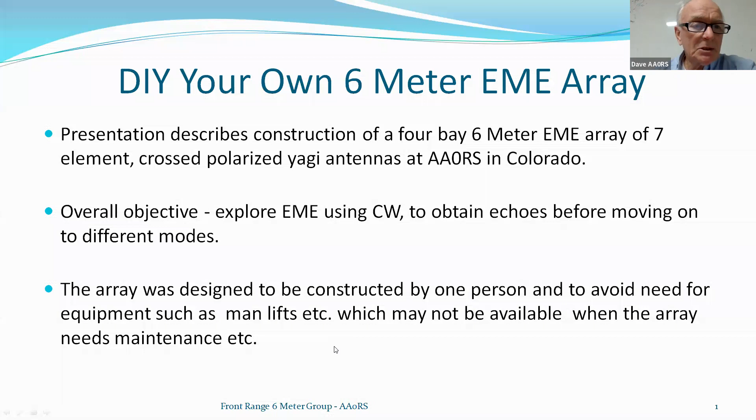So the next slide, please, Paul, number 3. Have we got that up? Paul, are you hearing me? Yeah, can you see the antennas? Well, no, I don't see the slide that you've got. I put it onto slide number 3, which just shows the tower with the tripods connected. Okay, I'm on the second slide, so I'll move to the next slide. Yeah. It says getting started is the title. No, the title of this one is Rohn 25 was used to support the array. Okay, well, I wasn't on your right slide when you were talking. That's why I was trying to make you move there. Okay, I've got a picture of the tractor right now.

Okay, well, that tractor, that's the bottom of the crane attachment that I was talking about. And you can see the winches on that. It just gives you an idea, if you decide to put one of these things up, of a way of making a crane so that you don't have to keep hiring man lifts and things like that.

Okay, now I'm on your Roam 25 now. Right. So when I first put this thing up, the first rotator that I bought was one of those Polish Procell things. And this is what it looked like. This is what the tower configuration was at that time. It became pretty obvious once I started building it that the Procell rotator wasn't going to do the job.

So I had to abandon that, and the whole top section that you see here wasn't man enough for the job. So I took that down. And I started off on slide number 4. I already had 3 or 4 sections of oil pipe. This is like 2.5-inch diameter pipe. And I welded feet on the bottom of the 3 pipes that were going to form the tripod around the Rohn 25 tower.

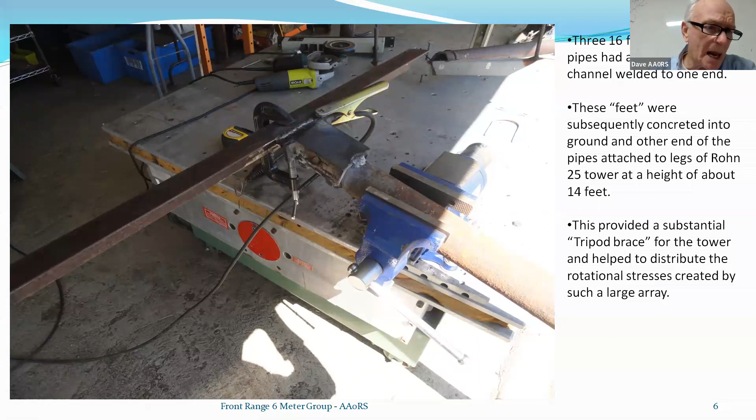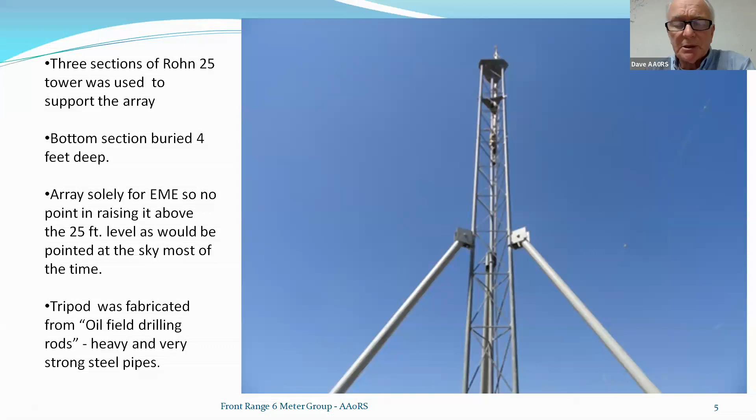And you can see the angle where I've welded onto the base of the pipe in that drawing. And if we go to the next one, this is number 5, Paul. It shows the top of the pipe, and these are the brackets I fabricated to attach the pipes to the tower legs.

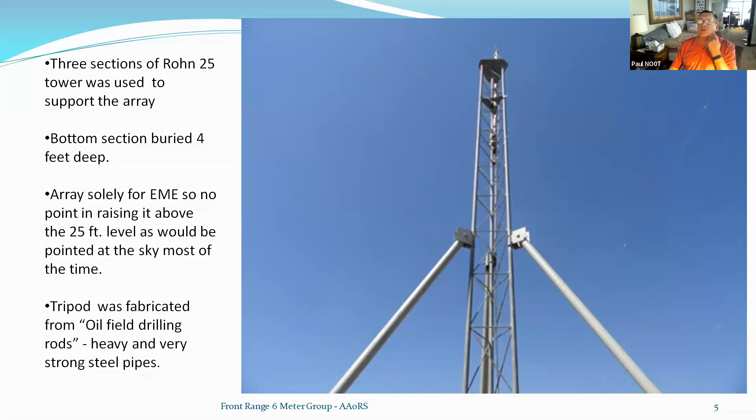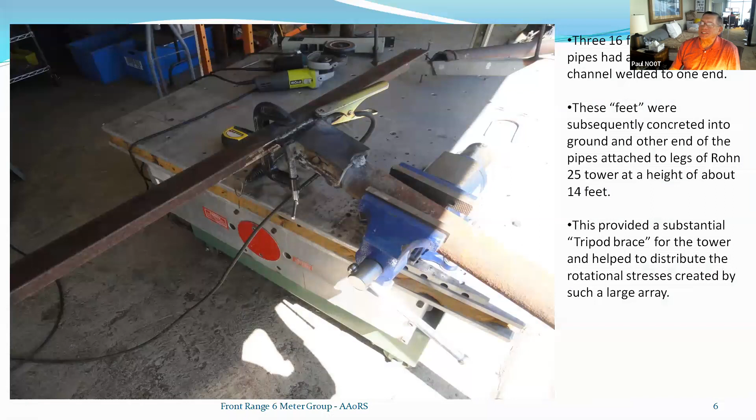Okay, I want to make sure I'm on the same number as you are, because I'm not necessarily seeing the same things. This slide is titled 3 sections of Rohn 25 at the top. That's slide 5. Paul, you need to add 2 to the number he tells you, then I think you'll be in sync. Okay, thank you. I'm glad somebody knows. All right, so what slide do you want to be on now? This is the one here, showing the brackets at the bottom. Right, okay, that's number 7, that's fine. Okay, so that's number 6 or 7.

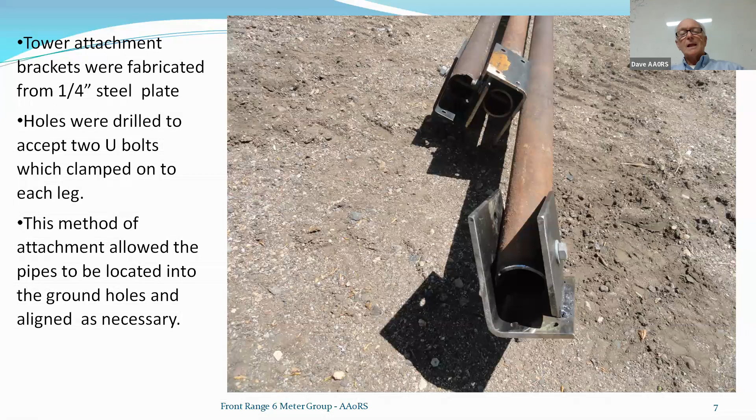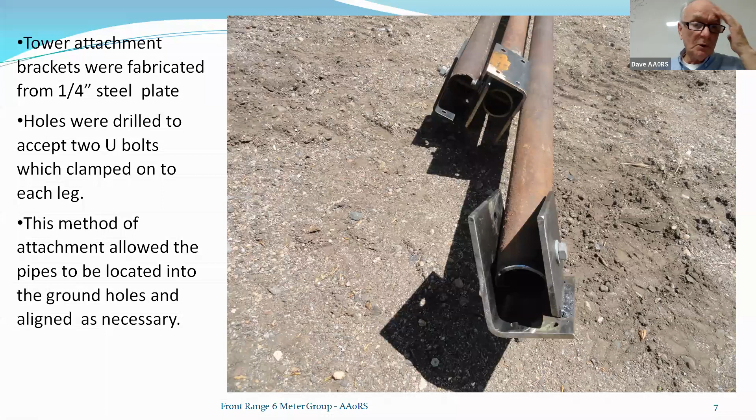That's number 7, right? Okay, so if you look at number 7, that L shape that you can see there, you can see the 2 holes at the bottom of it. There's 2 more holes below that, and that's where the U-bolts go through to the tower leg to hold it on. And that means that this leg is flexible. So if we go on to number 8 then, Paul.

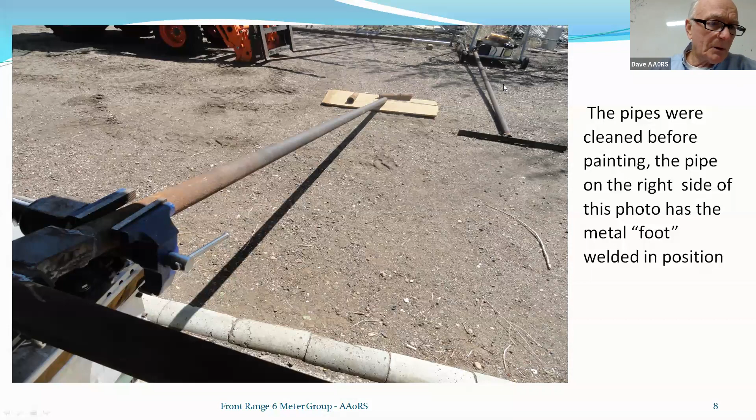Yep. Okay, so I used just a sanding machine to clean the pipes up, and then I spray them with grey paint. On the pipe on the right-hand side, you can see the size of the foot that I welded on the bottom of these things. Okay, so if we go up to slide number 7.

So I dug a hole, filled it with concrete, and climbed up the tower and clamped the leg, this steel pipe, onto the side of the Rohn tower. And when I got all 3 in there and tamped the concrete down, just left it to go hard. And the tower is now, you can swing around on the top of it and it doesn't move at all.

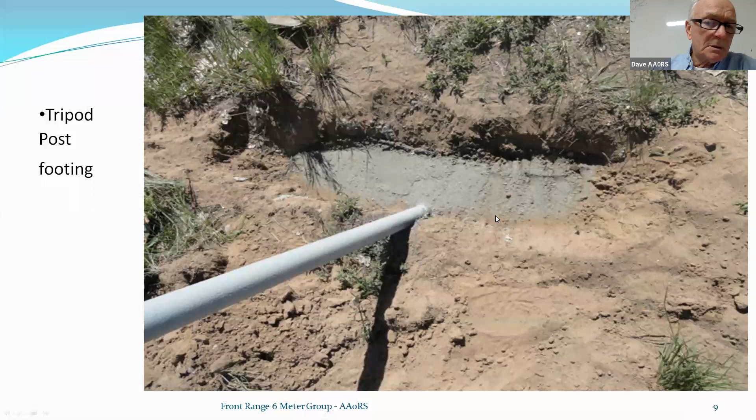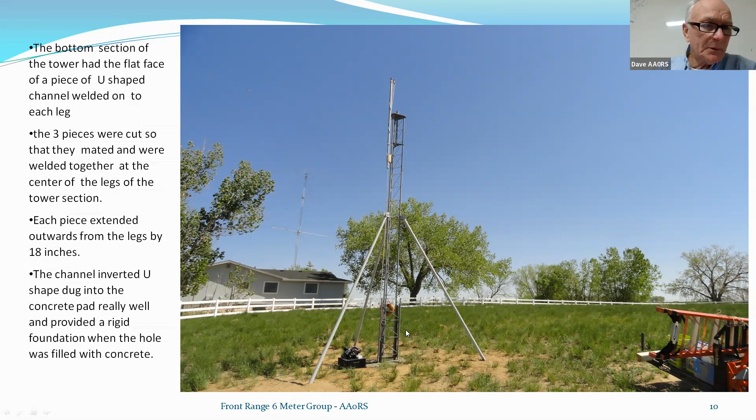So number 8 shows it from a bit of a distance. You can see I had an old piece of Rohn 45, which I slid down over the top just because it was handy. I didn't really need it, but you can sort of see that at the bottom of the picture. So then slide number 9 shows the revised top section.

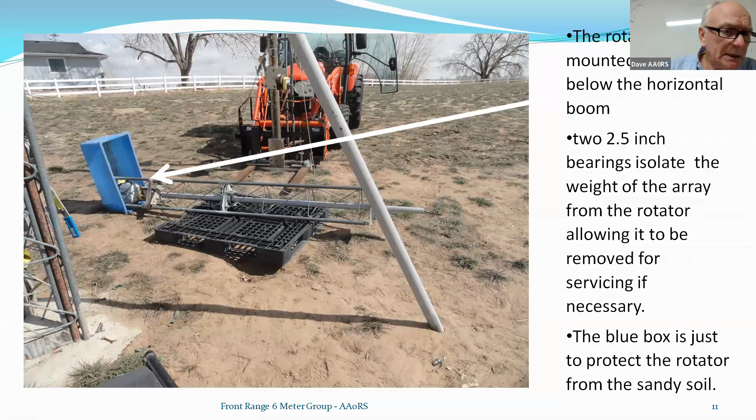The Polish rotator that I mentioned was a complete unit in the respect it did azimuth and elevation. And I wasn't going to go through that mistake again. So I fitted the M squared rotator at the bottom of this tower section, big rigid pipe with 2 bearings, and then hoisted that in the air. And you can see that on slide number 10.

You can just see that the tractor's in position. I've got the short jib on the tractor at the moment. It's nearly double that for raising the antennas. There's another piece that goes in the top. So you can see that's the way I got that thing up in the air.

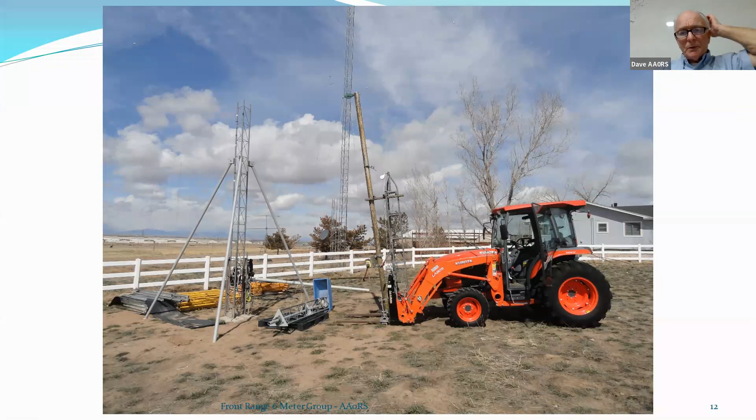So if we go over to slide number 11, this is the boom of the antenna. It's another section of that 4.5 inch, 1/4 inch wall aluminum with some extension pieces fitted to give me the 24 feet separation between the antennas. Very heavy. And you can see in the middle of it, I put 2 brackets and attached chains to the tractor to move that thing into place. So we go on to number 12.

Unfortunately, I didn't take a lot of pictures because I hadn't envisaged doing a presentation of this. I didn't think there'd be enough interest, but you can see now the boom in position sitting on those blue boxes. All of the diagonal struts are fiberglass. There's nothing in the main field of the antenna apart from the H beam running across the thing. That's the only piece of metal that's above the boom. Everything else is either very short pieces of aluminum or fiberglass.

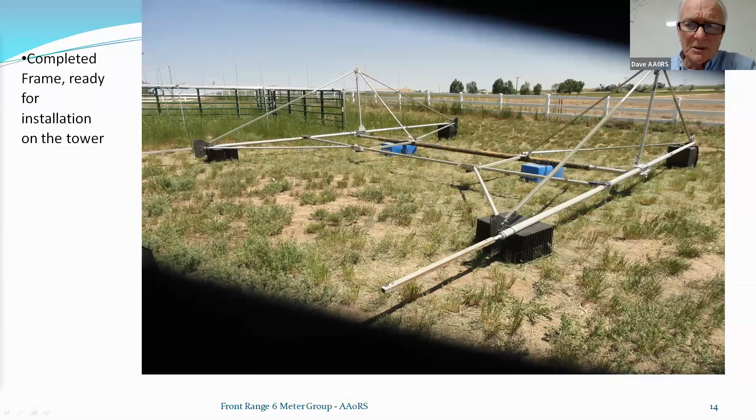Right. This is the main boom to H frame brackets. The main piece on the bottom there is steel. That's 1/4 inch steel plate, and then the rest of it's just aluminum, thick 1/4 inch aluminum plates.

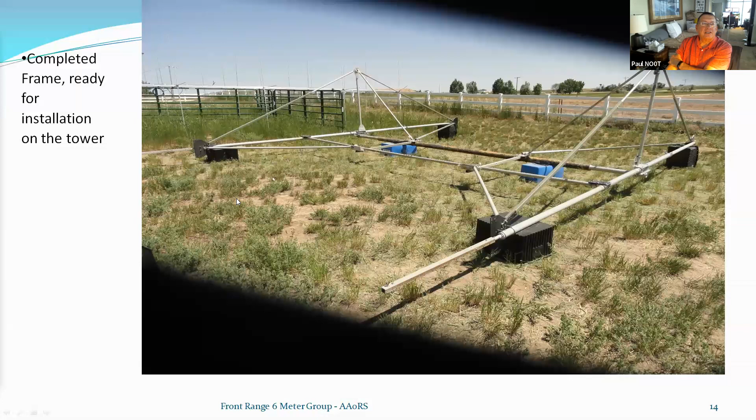Are you into the next slide already? Yes, that's slide 13. There we go. Got it.

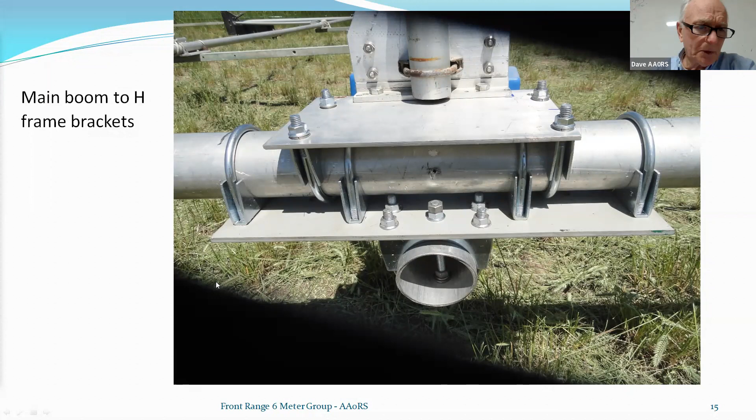So the piece of aluminum at the bottom of this, underneath the big steel plate, that's the boom. The horizontal piece is the leg going up and down, and then the piece going up is the piece that holds the two diagonal braces on each side. This is copied on the other side of the H frame. So if we get into the next slide, Paul, this is slide 14.

I just used whatever scrap aluminum I had. You can see this has been used before on other things, but all of the main brackets are 1/4 inch thick at least. And I found a source of supply of the pipe fittings, the U-bolts with proper saddles and everything. And some of them turned out to be really quite inexpensive.

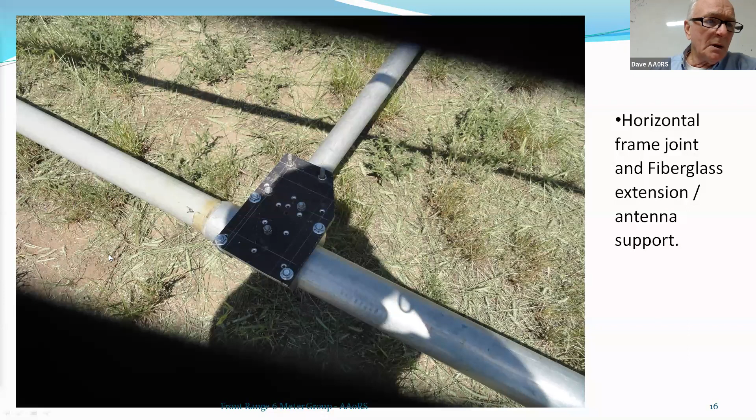So if we pass on to the next slide, you'll see here, this is the sort of triangular plate on the top and bottom of each of the H legs. And this is where the antennas clamp onto, this black piece. And the antennas sort of sit on top of this fiberglass tube. These fiberglass tubes are actually two tubes slid inside each other, and then a short aluminum piece is fitted inside that, so that when I crank on the nuts to tighten up these U-bolts, they're really tight.

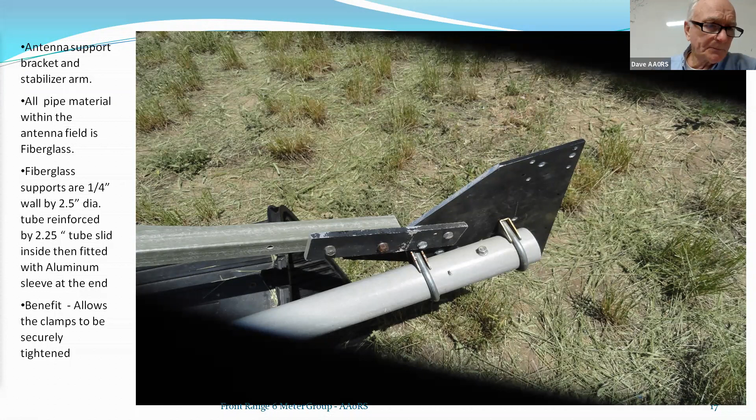And the piece going off to the left there is the diagonal support to stop the antenna moving around too much. So if we go to the next slide, I'll take you back to the extensions for the two top antennas.

Because my height limit on the scaffolding that I had was about 22 feet, and it wobbles around like crazy on rough ground, I didn't want to have to reach up 4 feet to try to get to the top and adjust the turnbuckles to tension the wires. So what I did in advance, I fitted two pulleys, one on each side of that, and I brought the tensioning wires down to the boom and fitted the turnbuckles there. So I was able to get to them without risking life and limb. And that turned out to work out pretty well.

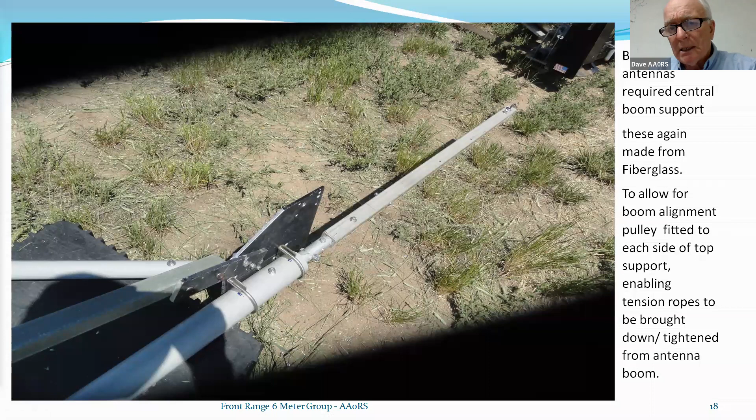You can also see on this slide that instead of taping the coax like it is on the boom, you see all the tie wraps. I actually spiraled it around there because it's very difficult to hang on the side and try and reach out and get tie wraps up in these places. And I also found that these tie wraps, which were about 3/8 of an inch wide, and I bought what I thought were the best that you could get, UV rated, all sorts of claims made. Well, these things didn't like cold weather, and a few of them popped off even before the winter really got going. So I'm still not impressed with them, but there you go, they're already up there.

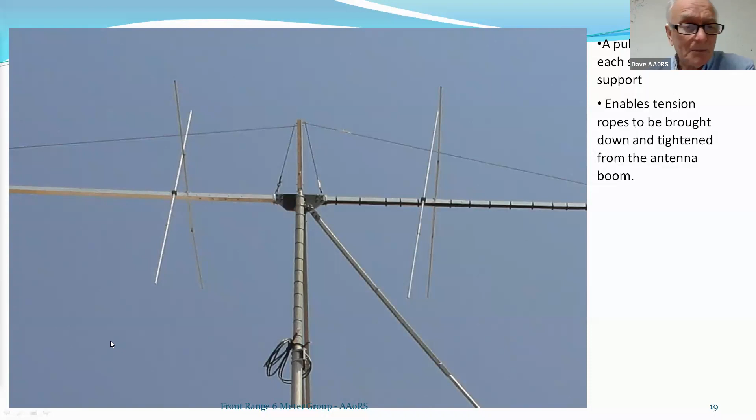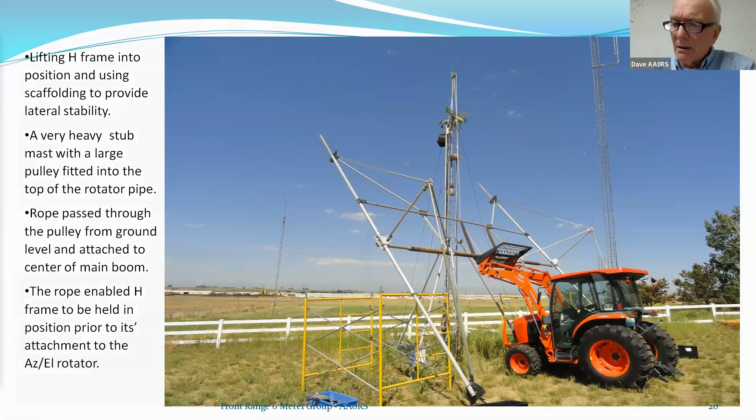Okay, so this frame, I don't know what it weighed because I didn't actually try and weigh it, but it's got to be close to 200, 250 pounds, I'm guessing. Nothing for the tractor, but I didn't want to try dragging this thing up so that it was scraping all the way up the tower. So I balanced it on two sections of scaffolding, and I'd already installed a very heavy stub steel pipe into the top of the tower with a rope coming down attached to the boom. So as I lifted up with the tractor, I got out of the tractor, went and tightened the rope up at the bottom, until the thing was up at about this angle. At which time I went to slide number 19.

Have you got that one, Paul?

Roger that. Okay. Now that I've added the extension to the crane jib, I've also put a backstay over the back of the tractor just to make sure that when I lifted this thing, it didn't go anywhere. And what I did, I just cranked on the winch and slowly pulled this thing up, maybe 2 or 3 feet at a time, went back round and tied the rope up, kept tensioning the rope on the pole sticking out the top, so that at any time if something slipped, it wouldn't actually come down vertically anywhere.

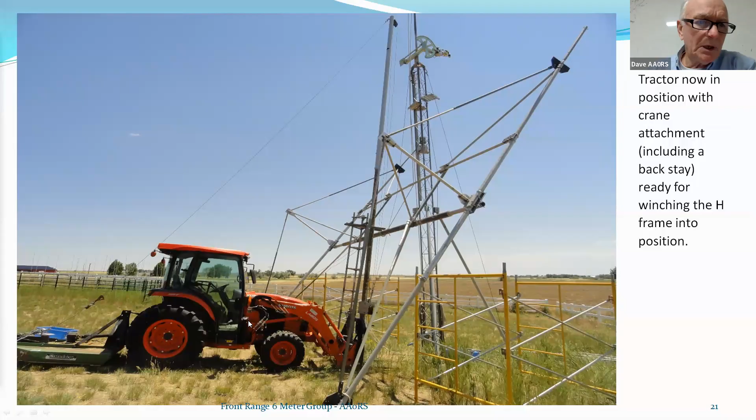So if we go to the next slide, which is number 20. And this is where the frame is now almost dead vertical, because as soon as you get it vertical, it swings into the tower, and that amount of weight would certainly shake the tower around a bit. So I was very careful to just allow it to slither its way across the surface of the soil until it was in place. And then it was a fairly simple job of winching it up slowly but steadily until the horizontal boom of the frame lined up with that M² rotator that you can see at the top of the tower.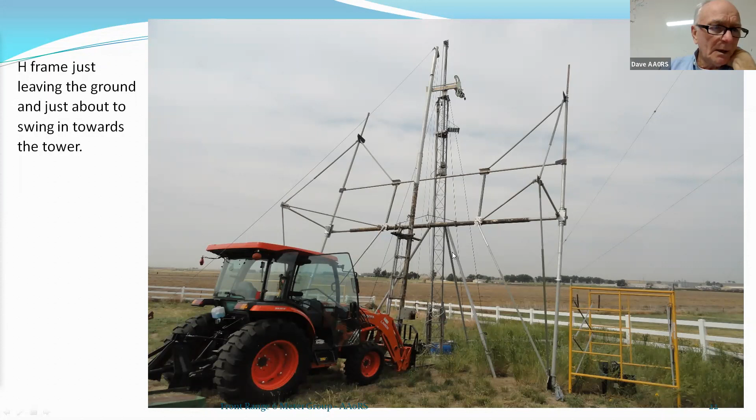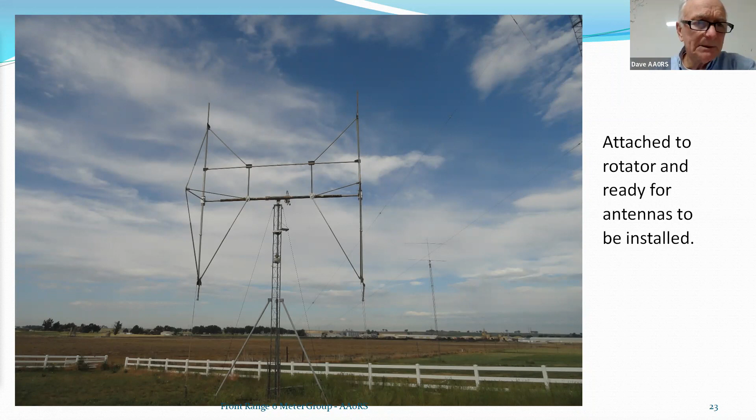And when it was all in place, slide 21, and all the garbage was moved out of the way, you can probably make a bit more sense of what I've been saying about the metal pipe out of the top. The H-frame is now bolted into the rotator unit, and all the garbage is gone from around the bottom. And then the next slide, 22, Paul, shows a side view of what the thing looked like when it was in full position. The antennas, once fitted in this position, would be about 0.1 degree above horizontal.

So now that that was all finished, it was time to start on the antennas. So if we go to slide 24, like I said, each element's more or less 10 feet long, and there's 5 feet sticking in front of you at any one time. So I made up some tripods, and you can see them in this picture, Paul. Is that what you've got in front of you?

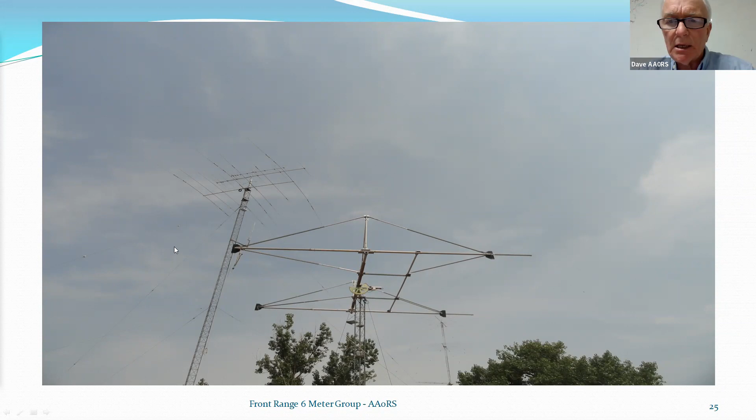I think that's Roger. Big green tree. You can see the tractor off to the side, the left side. Yeah. I can see the tree. Okay, I'm just looking at the antennas now on the tripods. Got it. This is slide 24 for you. 26 for me. Got it. Yeah. So

This is how I fitted the elements on, and even though these tripods were six feet high, they didn't quite give me enough clearance. So I bolted this about halfway down the boom of the antenna. You can see another fiberglass pole there, and it's clamped onto the boom. And the top of this pole is where I attached the temporary supports to stop the boom flapping when I moved it around.

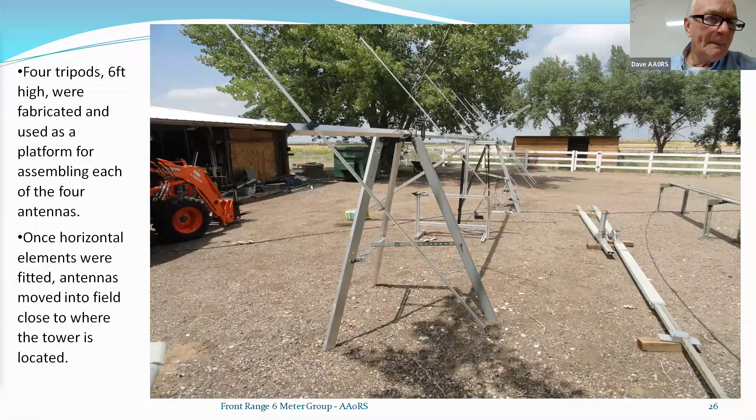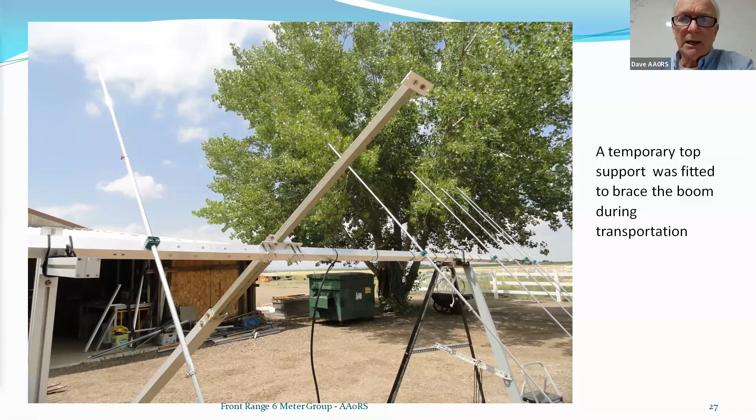And if we go to the next slide, Paul, 25, that makes it a little bit clearer as to what this thing was for, because any slight breath of wind would cause these elements to start turning one way or the other. The whole antenna wanted to keep on wandering, but as soon as I fitted this leg, it stabilized everything, and it also gave me 2 points to attach the tension ropes to. And the next slide shows that a little bit clearer. 26, Paul.

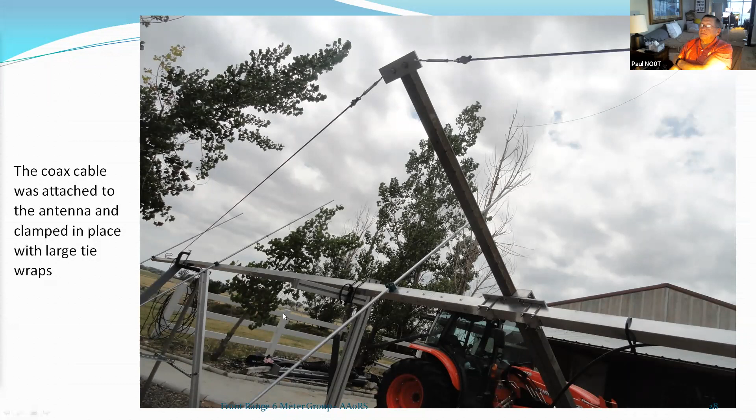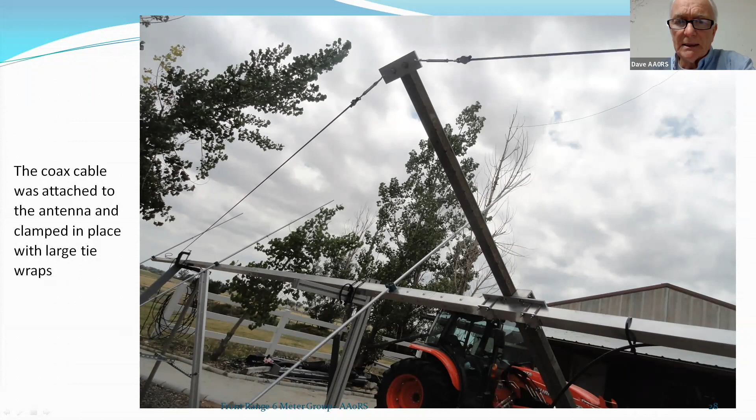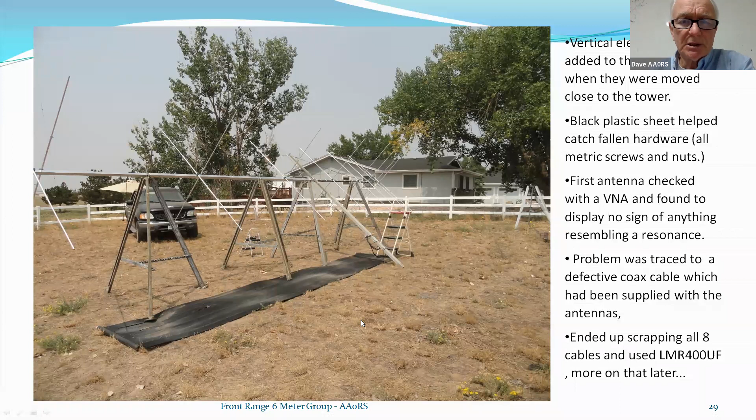Yeah, right on it. Okay, so once the antenna was built up like this with just the horizontal elements in place, I picked it up with the tractor and moved it round to the field close to where the tower was, put it on another set of tripods that I'd made, and then I fitted the vertical elements. And once they were all fitted and adjusted to what they're supposed to be, I coiled up the coax and started picking the antenna up, only to find that because I was picking it up at one point and it wasn't balanced, it was a nightmare to control. It's 30 feet long, it weighs quite a bit, and I ended up putting it back down again.

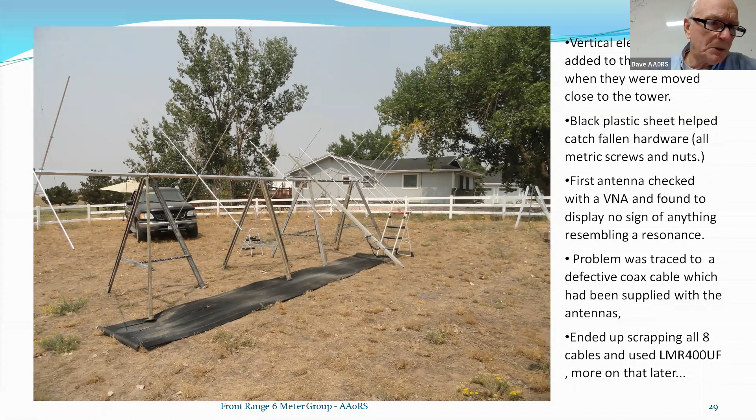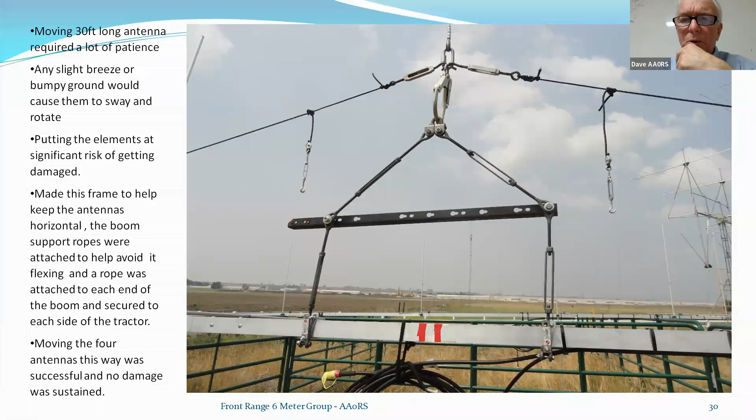And if we go to frame number 28, Paul, I made this bracket with a couple of turnbuckles on it, and the antenna didn't wobble around anymore. It stabilized it quite a lot. And Martin in Curacao there, this is well worth making, I would suggest, just for moving the antennas around. It worked out really quite well.

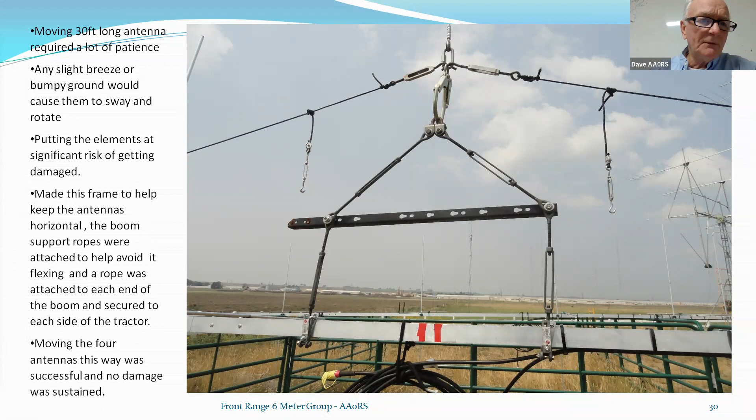To give you a perspective of this, if we go to the next slide, you can see the size of the antenna and all the elements on it. And this is actually how I moved them around the field and got them in place to put them on the tower one at a time.

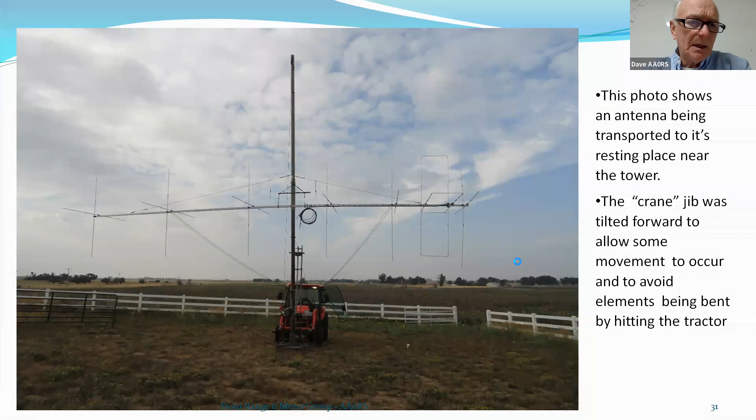Okay, the next slide is number 31, and this shows all 4 antennas built up and in position to be lifted onto the tower when conditions were right. I didn't want to try doing it on a day when there was any wind or there was a threat of rain or anything. These are just 5-foot horse panels, and again, if you're going to be doing a 4-bay array, Martin, you've got to find somewhere to stack these things because those elements poke out all over the place.

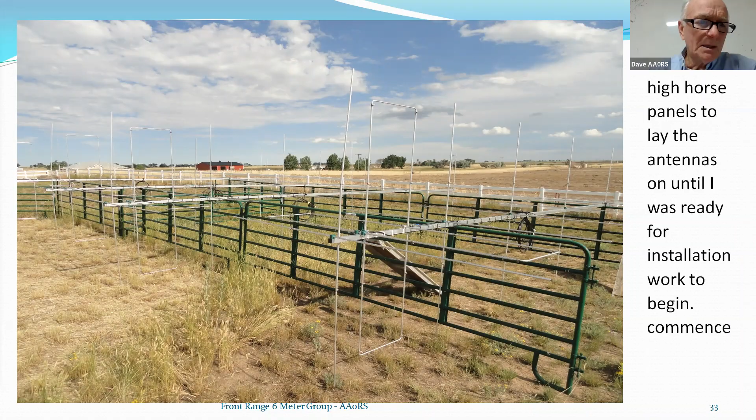The next slide shows what I call a squatter that moved in right in the middle of the crane there. Can you see that? Yep. See a little birdie? She hung around for a few weeks, but eventually she got fed up with all the movement going around. I left the crane in place for her, and eventually I tried moving the nest, but she wouldn't come back to it.

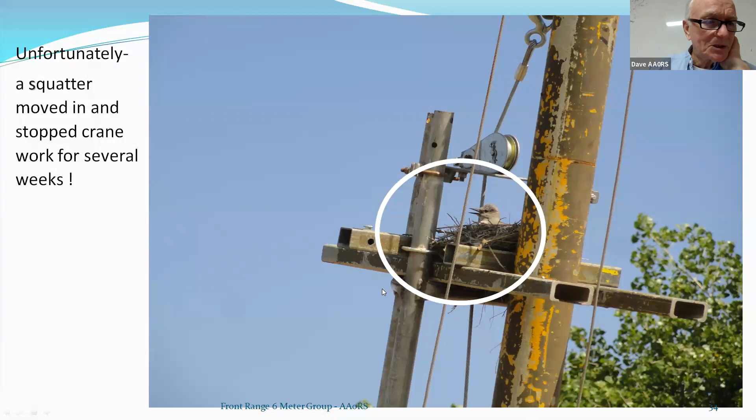So that was interesting. So if we go to 33, this shows the next problem, which is picking those antennas up off the horse panels. In order to do that, I had to lift the fork off the ground and lay the boom over horizontally, almost on top of the antenna. Then the hoisting rope got attached more or less to the midpoint of the antenna. But as you lift it up, the antenna wants to swing in towards the tractor.

So you can just see an 8-foot pipe that I put at sort of face height. Before I started lifting, I attached that to the bottom of the antenna, which would eventually be the front of the antenna, with about a 6-inch piece of rope so that it could move slightly. Then as I hoisted this thing up into the vertical position with the jib horizontal, I attached the hoisting rope to the middle, attached the rope to this 8-foot pipe on the bottom of the antenna, and then I cranked the boom up so that it went up vertically, and that was the way I was able to move the 2 top antennas into position.

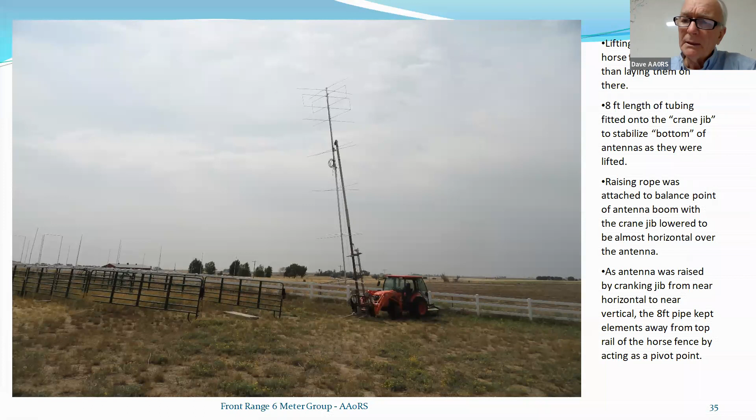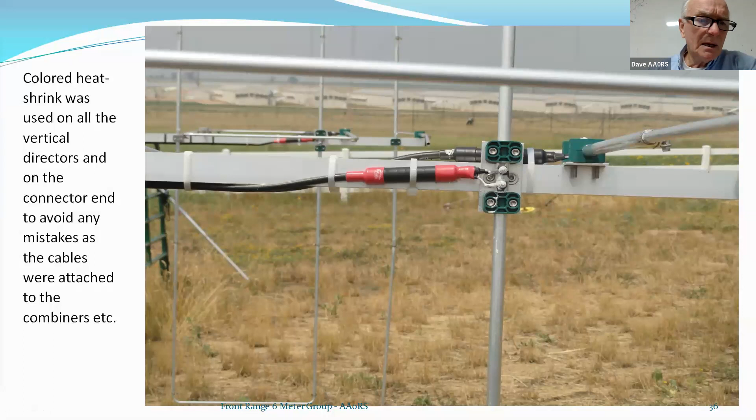So if we go to slide number 35, this shows the first of the top antennas in position, and you can now see those boom struts coming down the side of the fiberglass piece at the top there, and you can see the coiled coax coming down.

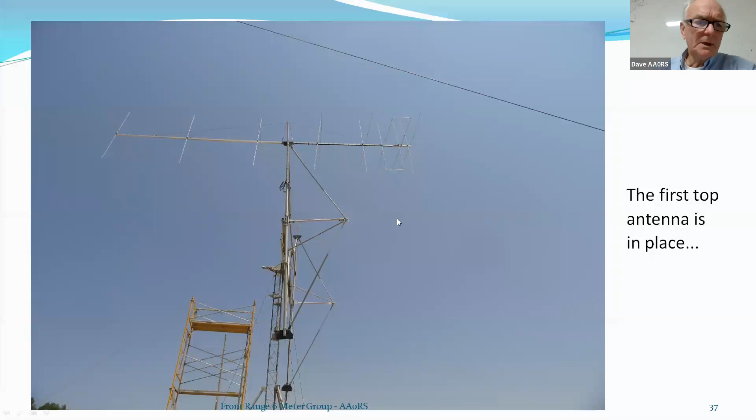Then if we go to the next slide, which looks pretty horrific, slide number 36, this is actually the last antenna going into place. As I say, I never intended to do any sort of presentation on this. I didn't think anybody would be interested, so I didn't take as many photographs as I could have. But every time you've got to climb up and down the scaffolding or in and out of the tractor and you're worried about the wind getting up, you end up throwing the camera to one side after a while.

But you can see how useful having this crane device was. I mean, I couldn't have done it without building that.

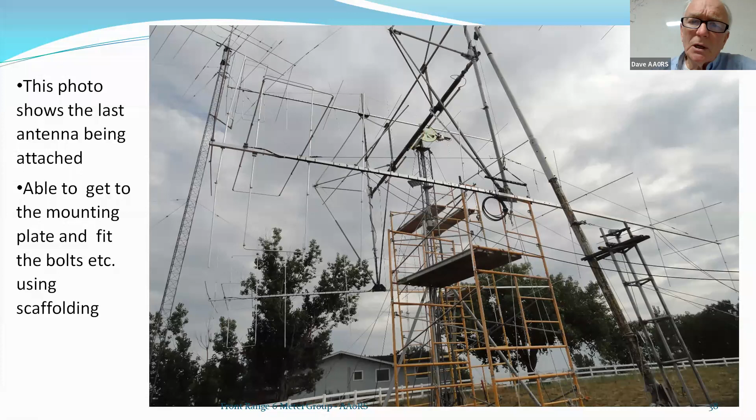If we go to the next slide, you can see the combiners, two lots. The purple tape shows the vertical, each side's got two vertical antennas connected to it, and the horizontal ones go on the unmarked ones. They clamp onto the boom, which allowed me to reach out from the rungs of the tower. It was fairly comfortable to reach these end connectors to attach all the antenna coax lines.

How did you seal the end connectors on the ends there? What did you do to keep them? Yeah, I used self-amalgamating tape, that black stuff that you wrap around and stretches. And then once that was in place, I coated that with some plastic tape, the good stretchy stuff you can get from Home Depot, about $3 a roll. That's really good stuff for doing that.

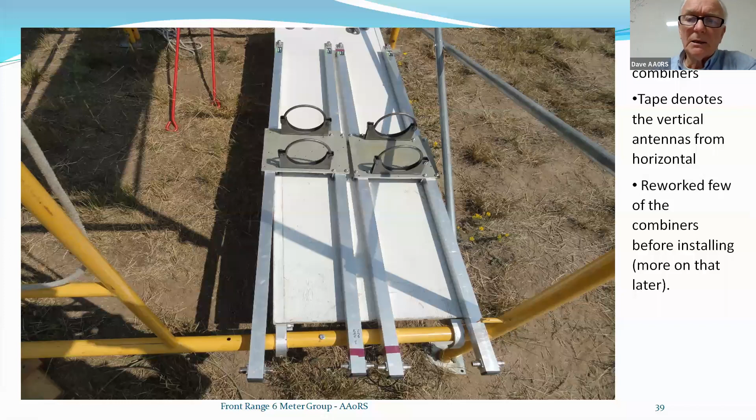So the next slide shows the final combiners, where you take each pair, the two vertical pairs and the two horizontal pairs, and they go into these two combiners. That's also connected up onto the boom. So that more or less covers everything I have in terms of actually building the array.

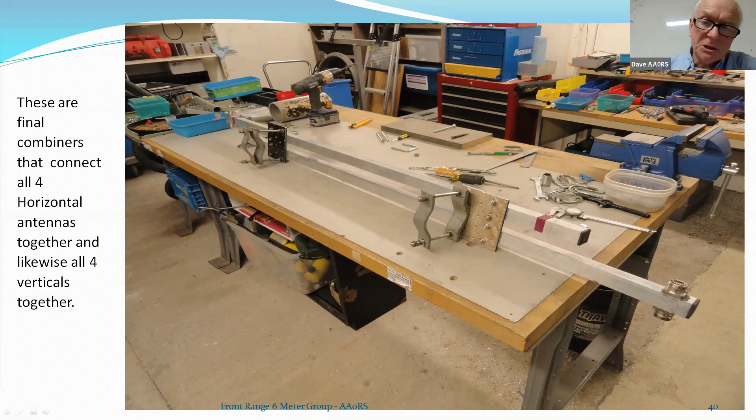The sad part was when I built the first antenna, when the horizontal section was on the ground and I was about to move it, I just threw the VNA on there to have a look, and it was terrible. It didn't look like an antenna at all. When I started finding out what had gone wrong, you've got the coax picture there, of you, Paul. What it turned out was that the inner core of this coax had shorted out.

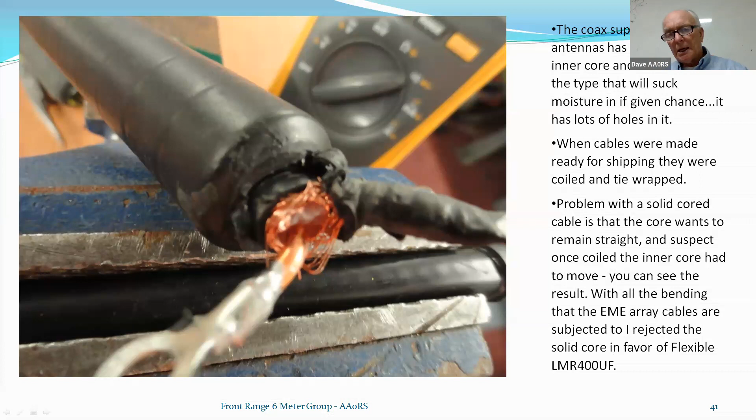It had pushed forward. When these coaxes were made back in the UK, they coiled them up into about an 18-inch diameter, and the inner core came out of the end, basically. I had some of the end connectors where the pin had either gone into the connector almost completely, or it had pushed out. This happened to be one of the ends that connected to the actual antenna. It wasn't the only one either.

I bought some LMR 400 UF, which is much more flexible than this stuff. This really isn't suitable, I would suggest, for an array where you've got lots of moving parts and 4 or 5 coaxes all being bent at any one time.

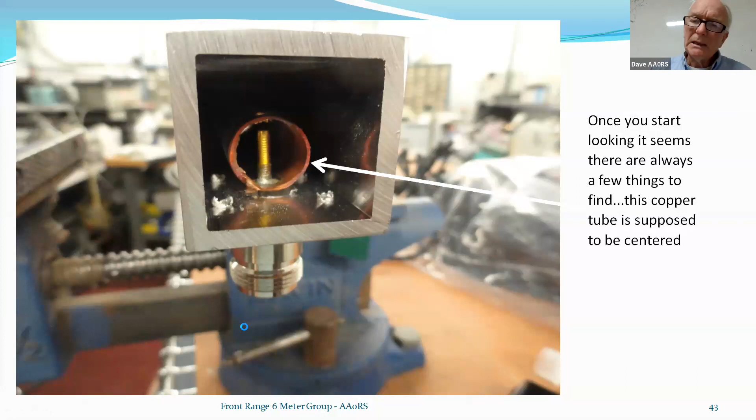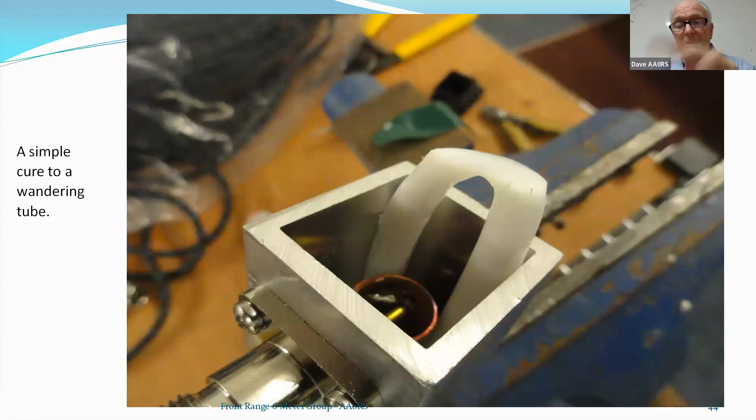Because nearly all of the combiners had this type of problem, if you go to the next slide, I got some scraps of RG393, the brown stuff, the 50 ohm brown stuff which has got Teflon inside. I sliced up some 4 or 5 inch pieces of that, and by cutting a piece off like that, you could fold it nice and easily, and it went down the side.

Slide 43 shows you the 2 pieces in there, and that copper pipe's not going anywhere now. So that's a modification well worth doing.

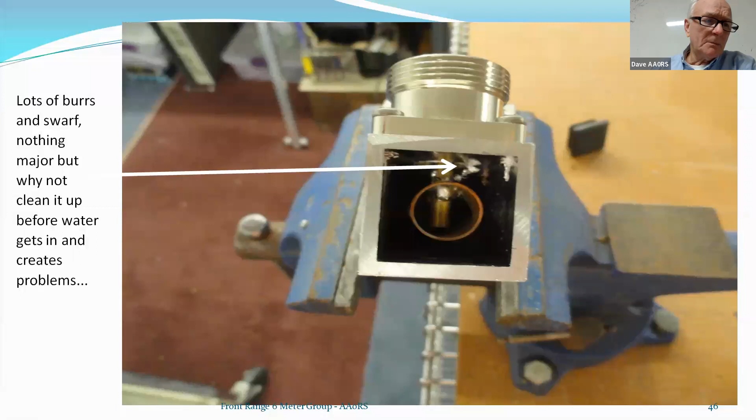I'll show you the last of what I consider the horror stories, slide number 46, where we've got these big APC7 connectors to bring in the 1.5 kilowatts. You can see what I found in there. This piece of copper tubing has got this piece of aluminum swarf - I don't know what you call it here, that's what we call it in England, swarf.

Just waiting and ready to short out. It probably was already, I didn't measure it at the time.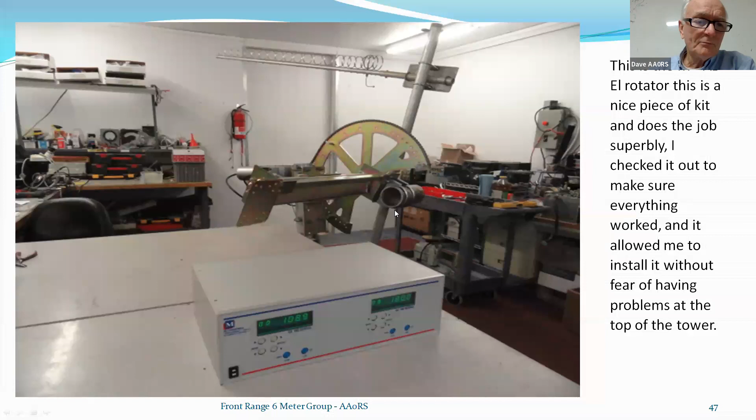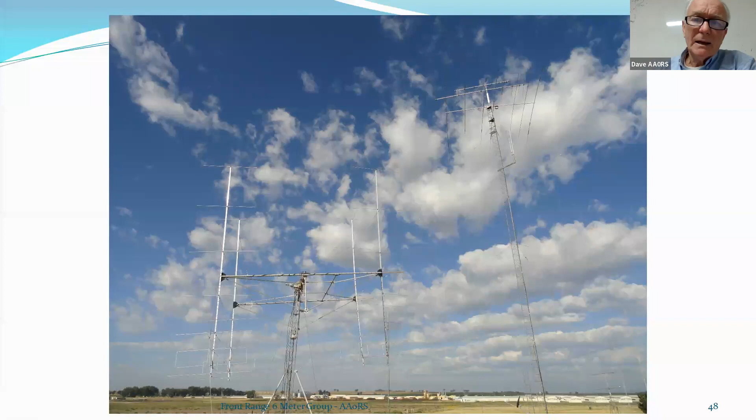Going on to number 47, Paul, this shows the best piece of engineering equipment I've ever bought. I don't buy much stuff unless it's got a particular feature that I like - I prefer making it so I can break it without feeling bad. But this thing is really, really good. It did exactly what they said it would do, and it was very heavy - I had to use the crane to lift this to the top. You can see the small piece of 4.5 inch boom material in relation to the size of this thing. It's a hefty piece of gear.

So we go on to slide 48, which shows the antenna up at about 85 degrees. It's very close to being completely vertical - there's still plenty of ground clearance there for the vertical 5-foot elements. And then the last slide shows it in the nested position, ready for moonrise. That's it, gentlemen.

Very good, I think it's awesome. And where do you tie the ropes?

The ropes I tie onto those black pieces there at the bottom. I just thread the rope through there and pull them out to ground anchors, which I screwed in the ground. And when I'm not using the antenna, I always point it at 117 degrees of north - basically at Florida, Georgia, because in the mornings at 5, 6 o'clock when I get on and check the band, those guys are working each other. Now and again, by calling and calling, eventually someone says 'What was that?' and they can hear - sometimes they can hear the call sign. But I don't bother using this antenna for that.

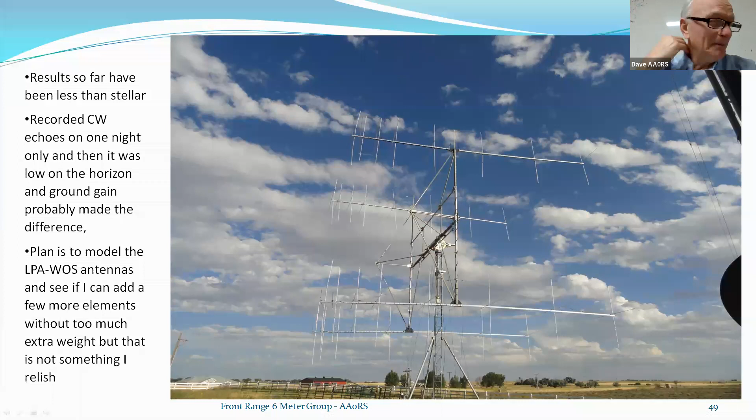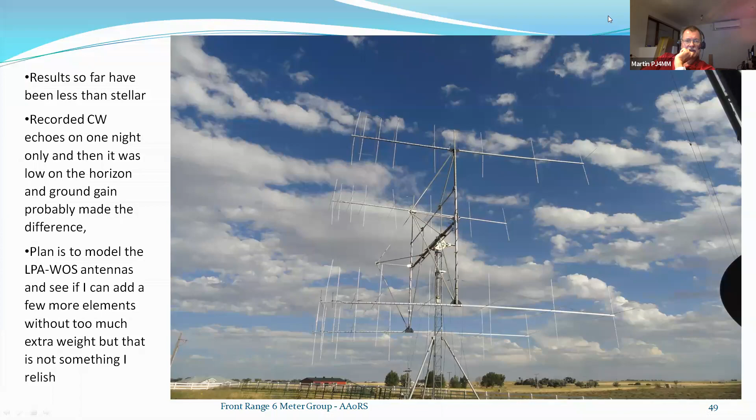Any other questions, comments? Just as I see you're using 3 two-way dividers per plane, what is the advantage above using a single 4-port divider? That's what, when I decided to put this thing up, I just ordered the 4 antennas with the couplers and everything, because I knew I wouldn't have time to build all the antennas from scratch. So I just put up what came with the antennas, and if I had it to do again, I would definitely look at that, because I'm planning to use a 4-port divider.

DG7YBN, I think, is the guy. He's got a website describing a 4-port combiner stuff, and that's well worth looking at before you get started, Martin. Seems like you know what you're doing anyway, but it's always worth looking at what some of the guys over in Germany did. Some of it's pretty good stuff. I don't know if Lance has some comments on that.

Yeah, I built my own four-way power divider, and it is a lot more involved to do that. It's definitely the better way to go than to use all these different two-way power dividers. But if you don't have access to the parts for building one yourself, and I've got details on mine on my webpage, you can just use, for a 4-way power divider, some good low loss coax